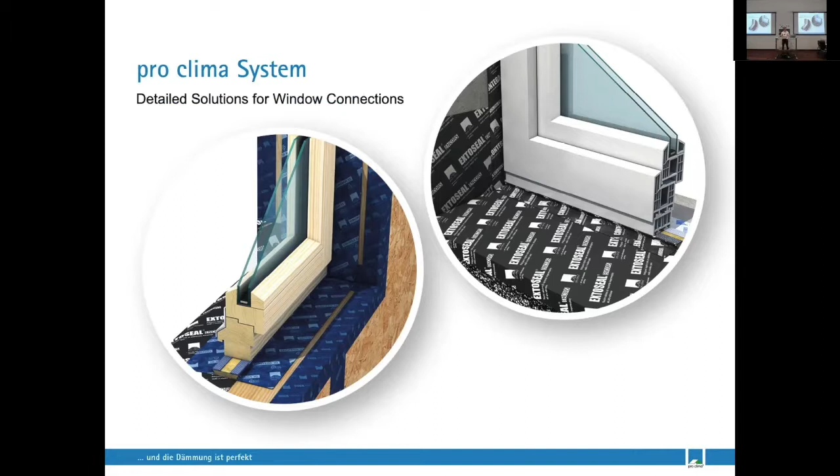All the systems that we do are the secondary barrier. They're not the primary barrier, but they should be the secondary barrier, and they should be 100% waterproof. It's an insurance policy to not get water into that structure and allow the structure to dry out.

Essentially your house is your castle and you want your castle to work. You build this for your family, you build your homes for your family, and you want to protect your family. That's what it's about—having a healthy, safe and durable structure for people to live in.

So the enclosure sits there, you have a building, then you have the elements that go into the building. You've got the construction systems, and hopefully you've layered them right so that the system will dry out. And you have these forces acting on the structure.

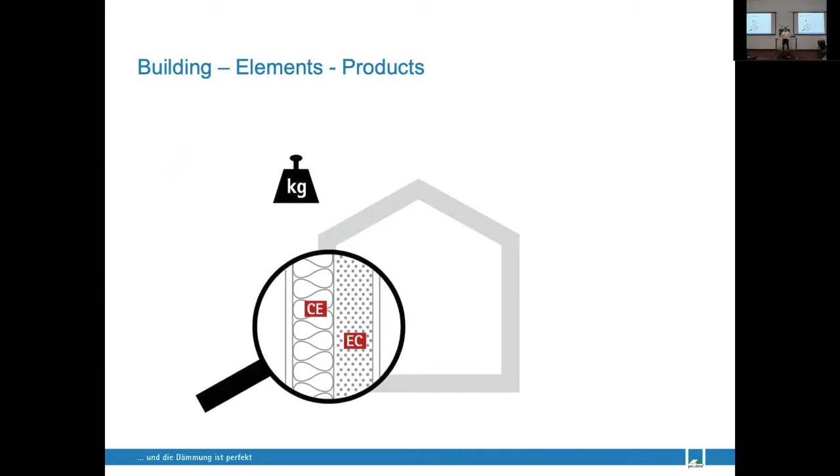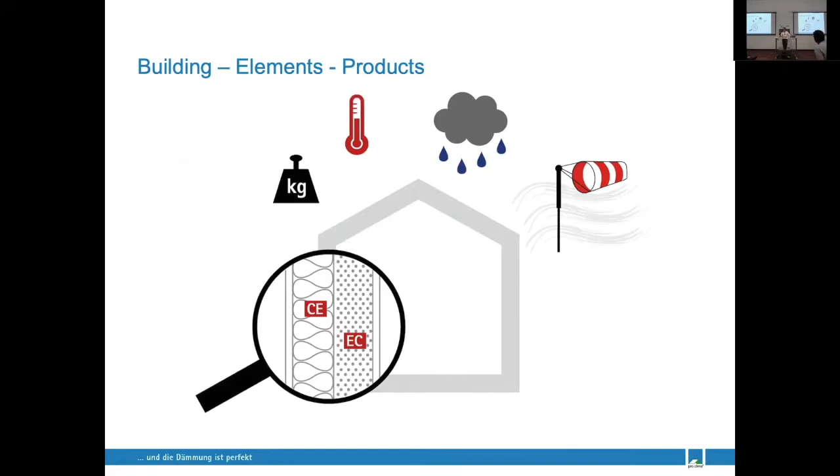You've got physical forces, temperature forces, thermal, and wind and rain forces on that structure. You have to deal with all these in the building envelope, but then you've got additional micro things happening within the structure itself—moisture flows and thermal flows, which affect the hygrothermics or thermal dynamics and the moisture flows in that structure.

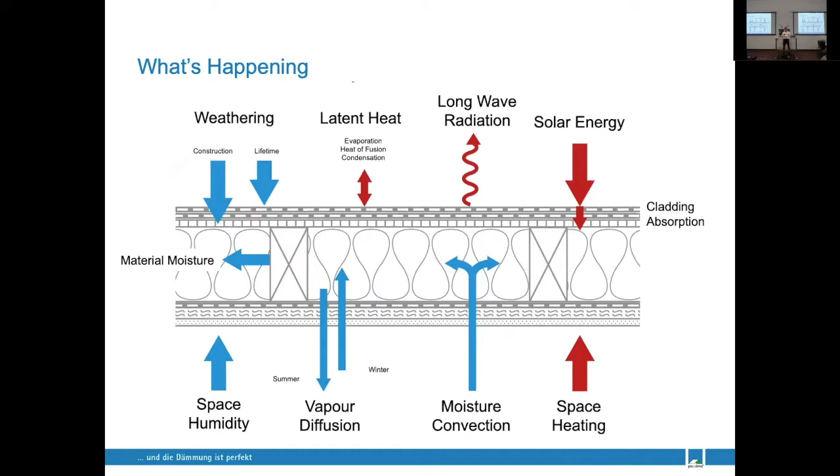So we need those structures to be able to handle moisture. They need to handle the external moisture and the internal moisture, which is built into the New Zealand regulations in some respect. So understanding the fundamental principles helps us design systems that work.

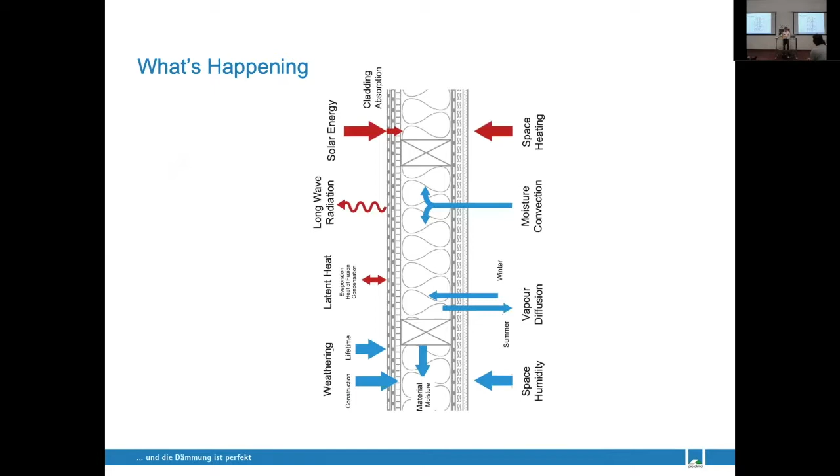In terms of a wall structure, it has to do exactly the same things as a roof structure, and you've got all these things acting on it—vapor diffusion, latent heat, long wave, short wave radiation—all these funky physics things happening.

Driving rain is very important for window installation. Wind pressure is fundamental—wind is actually what drives physical forces on the window, so it doesn't fall out, but also causes water leaks. So managing wind loads on and around the window installation is very important.

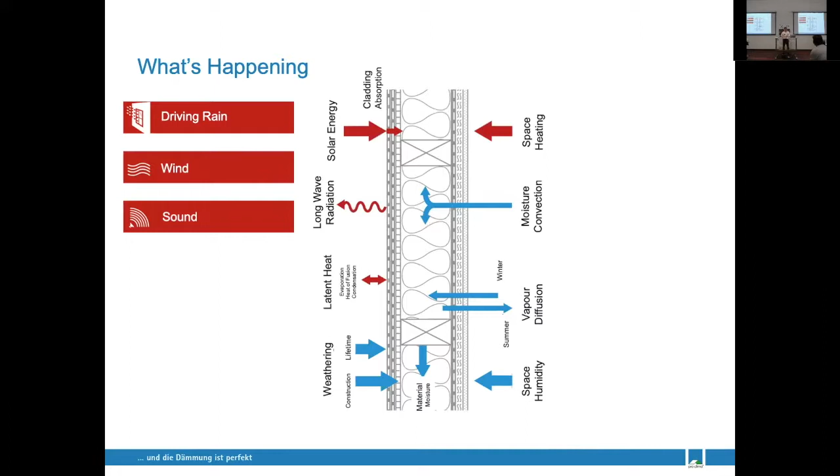Sound—windows systems also have to manage sound. Self-weight, so the whole structure has to stand up, obviously. We have large temperature differences.

In summer, in particular, you can get very hot external claddings and large temperature differentials. You have diurnal swings, very hot during the day, 60, 70 degrees, and then it can go sub-zero at night. So the structure has to be able to handle these temperature swings.

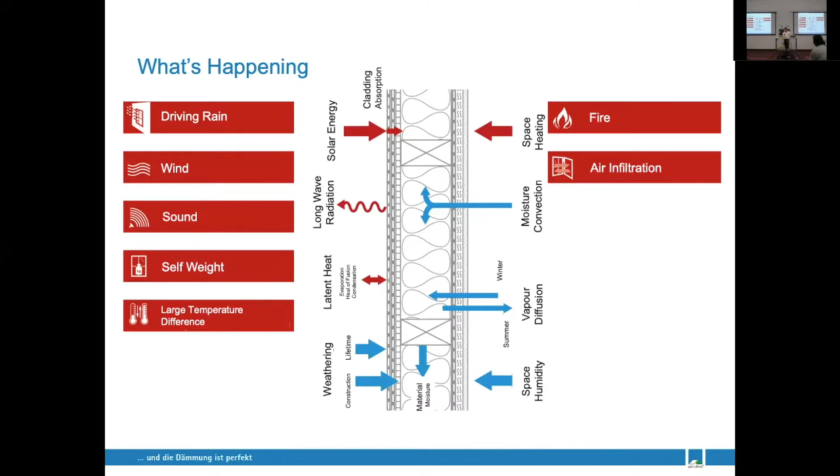Fire properties are important for the building code. Air infiltration—this is from an energy perspective, managing that infiltration so you don't get energy losses or gains depending on the season. Movement of the frame is also important, because that's when things start to fail—if you get moving structures, things crack up and you get failure of the systems. And building movement.

So when you get earthquakes, things move and things break. I don't think I need to tell you that—I'm from Australia, you know more about that than I do.

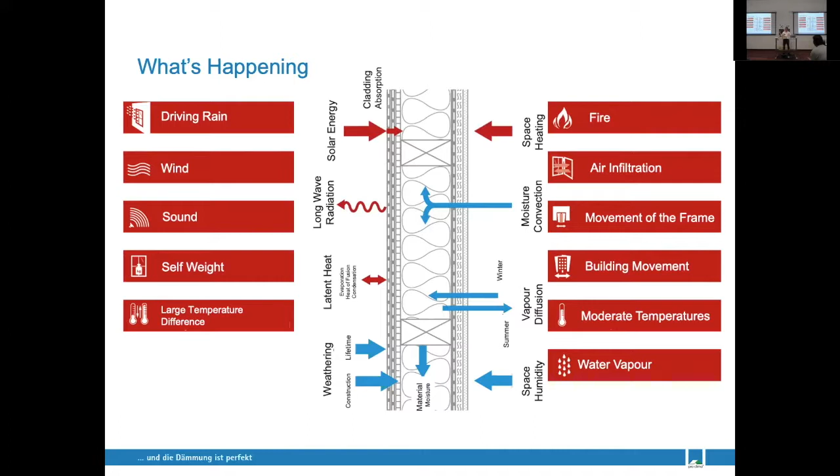Then there's moderate temperatures, the internal temperatures and what's happening inside the structure day and night. And obviously water vapor, which is a big thing Pro Clima is about—managing water vapor getting into the structure and allowing it out, the drying capacity of the structure. If you take all those things the wall system does, we need to put that into the junction, the connection between the window and the wall structure. We need that little gap to do all those things the wall system does, and we want it to be as high performance as the wall system if possible.

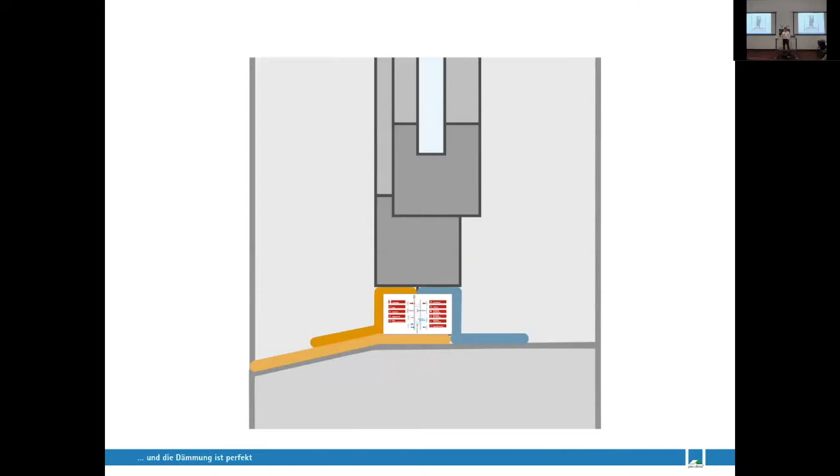So how do we get that to work? We need to make sure the products we use and the workmanship are of high quality.

Looking first at the actual window system, in terms of managing moisture we need to look at what sort of framing systems and glazing systems we're using. If you use double glazing or high performance glazing systems, you're going to keep the internal surface warmer, which is good from a condensation moisture perspective.

What you're seeing here, thanks to Technoform for supplying this, is an unthermally broken aluminium frame that gets very cold. If we're not using decent window frames, we get very cold internal surfaces, and that's potentially a condensation problem—you get wet window frames, condensation forming, and that ultimately results in mildew or mold growth.

So if we start moving towards higher performing thermally broken window frames, this critical line we're looking at is basically a condensation point along the window. If you use better frames, that condensation point moves in and you don't get that cold internal surface, so you prevent the condensation from occurring.

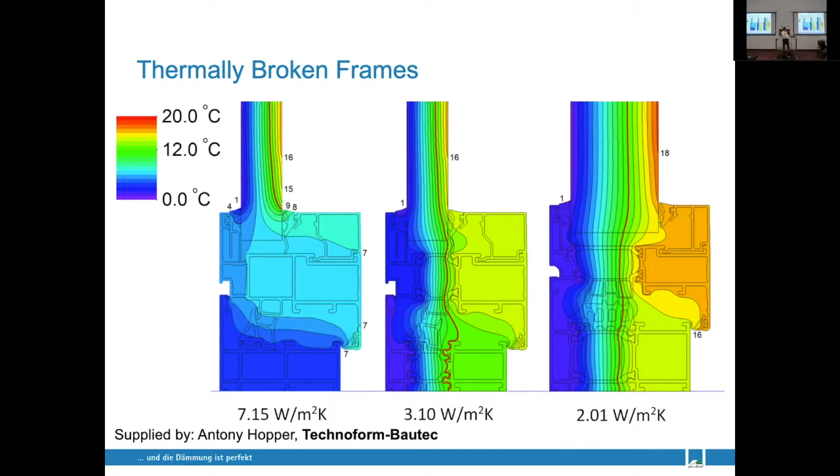And then of course going to super high performance frames and triple glazing units, which are even better. So if we've got this high performing window system...

Air leakage is a big issue. Obviously the window systems have to be air sealed as well. You don't want air leaking through the window frames and through the seals and gaps around, and how the seals on the sashes seal into the window frame itself. So it's very important to have well air sealed window systems.

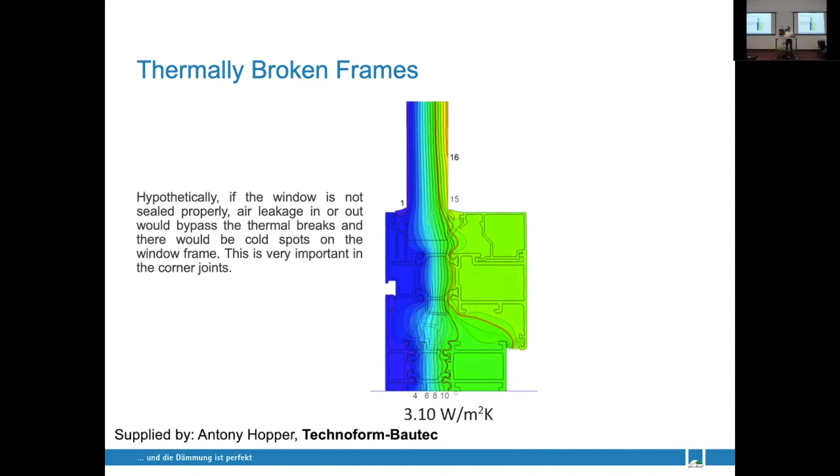And then the thermal breaks in the glazing are very important. This is showing an aluminium thermal break in a double glaze system, where you get higher conductivity around the perimeter and end up with a fair amount of condensation occurring around your double glazing window. This is because it's basically got crappy aluminium within that glaze unit itself.

Versus a high performance, low conductivity spacer within the IGU—then you get that line brought back in, and you don't end up with condensation forming around your IGU. So you should be using low conductivity spacers within the IGUs, or at least asking your manufacturer to put them in for you. So, a warm edge spacer versus an aluminium spacer.

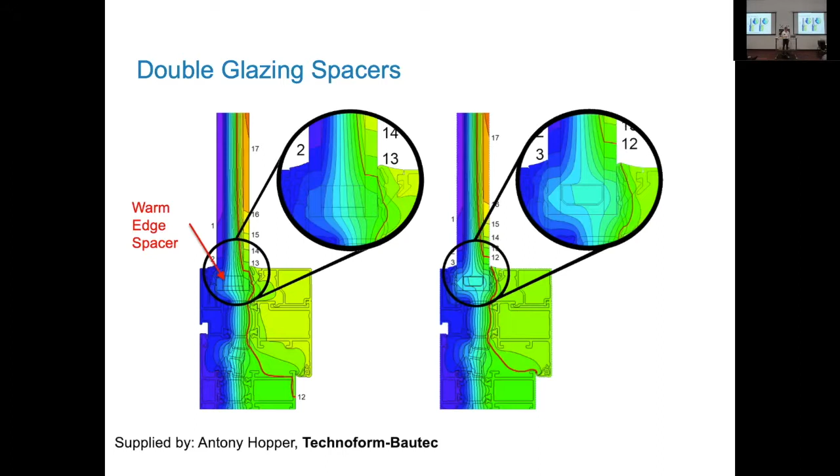There you go. And then once you've got your high performance windows, there's no point in installing them incorrectly. This is showing a relatively typical installation detail for an aluminium frame, with the internal window sill hanging right outside the building.

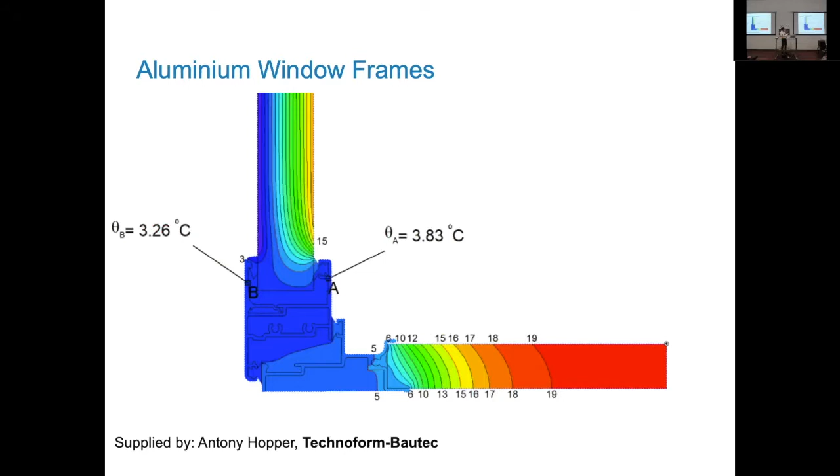The aluminium frame is going to get very cold, and you've got this huge cold surface for condensation and moisture to accumulate on. The only good thing I can say about that is it probably draws a lot of moisture out of the internal air and dehumidifies, but that's probably not the best way to do it.

So then you come down to that scenario where you've got the window hanging right out with an aluminium frame, which is not a very good solution at all.

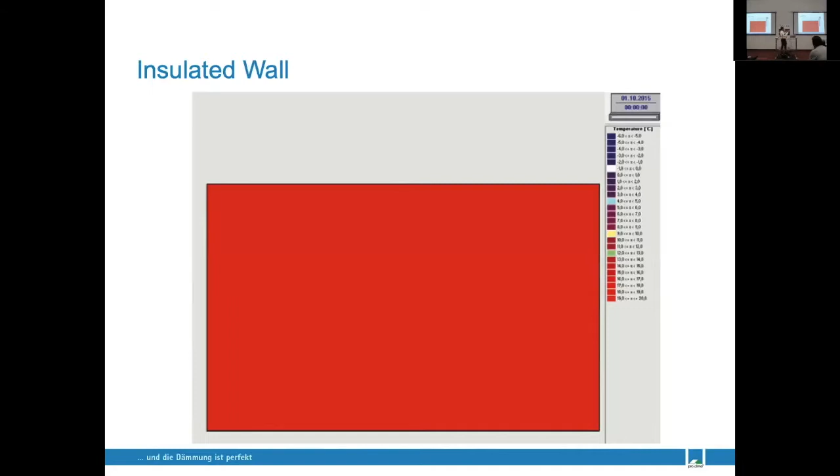So how should we position our windows? Hartwig went through this, but just to recap: if you've got your wall there, it doesn't matter what it is, say it's an insulated SIPS panel for argument's sake. If you look at the isotherms through that, outside and inside, what I call happy isotherms is when they're all separated, evenly distributed, and don't cross or go near each other, so you don't get weird effects happening.

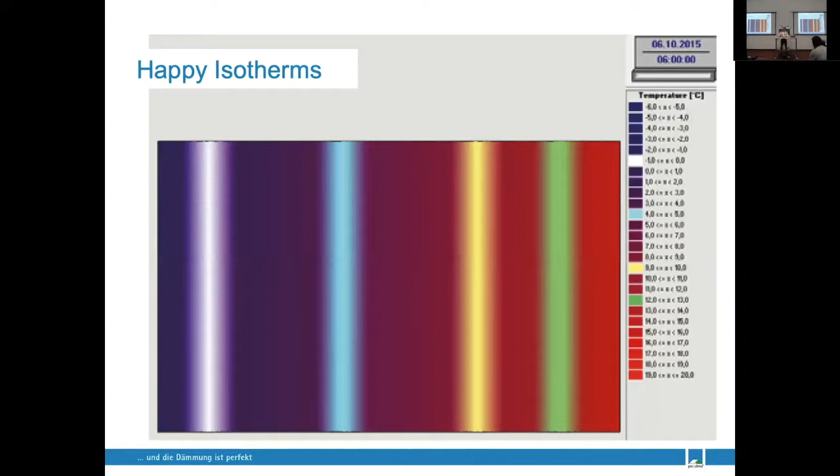They're still happy isotherms when you put your window in the middle. But you can see what's happening there is that the window is actually creating a thermal effect, and those isotherms are having this break in them. It's hard to avoid that.

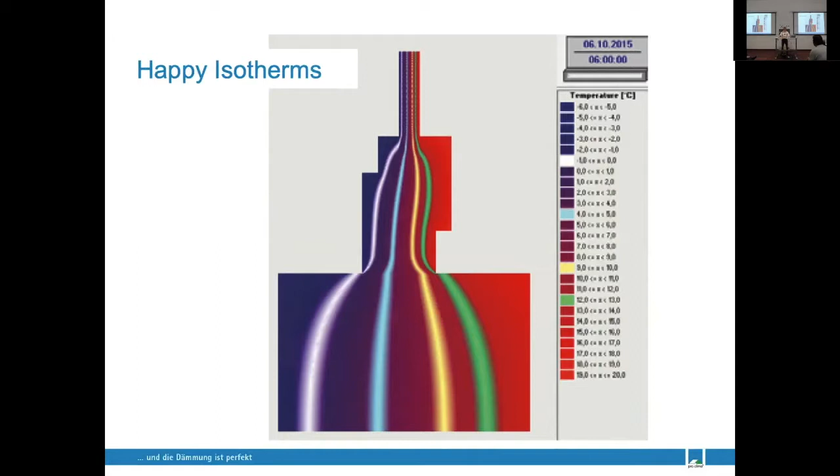Then that's when you start getting into all sorts of details around window junctions and organising the insulation layers such that you can optimise that for thermal performance.

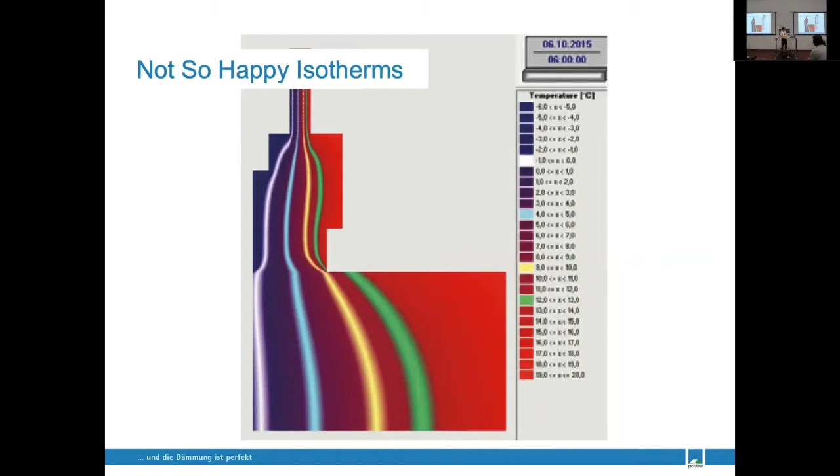So then, as Hartwig was discussing, if you change the location of those windows and put them on the inside, you've got this scenario with a cold internal surface, and it gets nowhere near as good performance. If you put it on the outside, you've got this cold spot in the corner, as Hartwig mentioned. So obviously the best place to put it is in the middle. How do we get window details where the window goes in the middle of the insulation system of the insulated wall section, depending on how you make that? It could be anything, but it just has to sit in the middle of the insulation section.

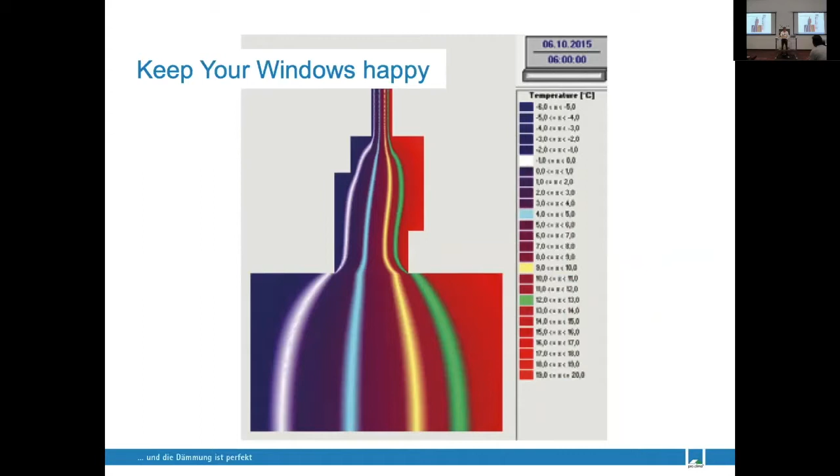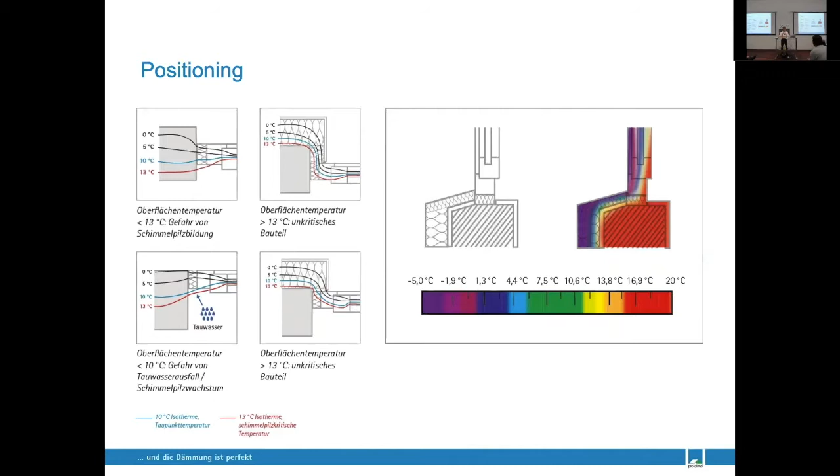There are all sorts of details and ways you can address that, and Europe's gone far further down the track looking at exterior insulation systems and how they wrap them in. But we have different construction practice here, a lot of lightweight timber frame, which gets back to the EIFS systems and how the US suffered water ingress issues. So how can we learn from North America and Germany, and get those details so we can manage thermal performance but also moisture ingress.

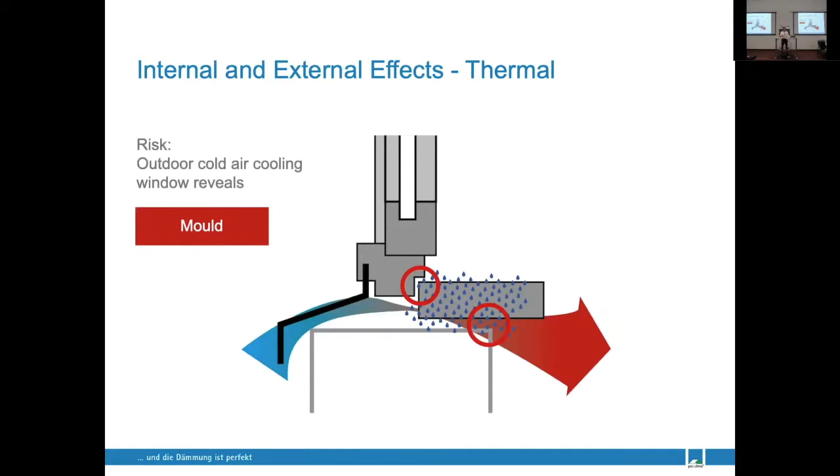So fundamentally, air and moisture are interlinked, because basically you have humidity or moisture in the air itself. If you have air leaks around your window, it can carry moisture with it. So when you have cold air transferring from outside and it cools down an internal windowsill, you can end up with cold spots and then high moisture content in the windowsills, which then turns into mold growth and long-term durability issues. So that's a bad thing.

And that's just an example. Again, this is a German windowsill, but it's an air leakage problem that's cooling down the internal surface, resulting in mold growth - you can see a bit of staining in there.

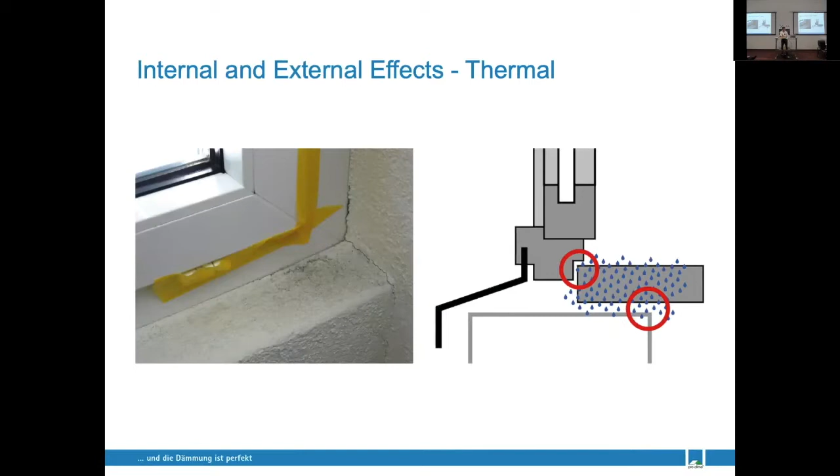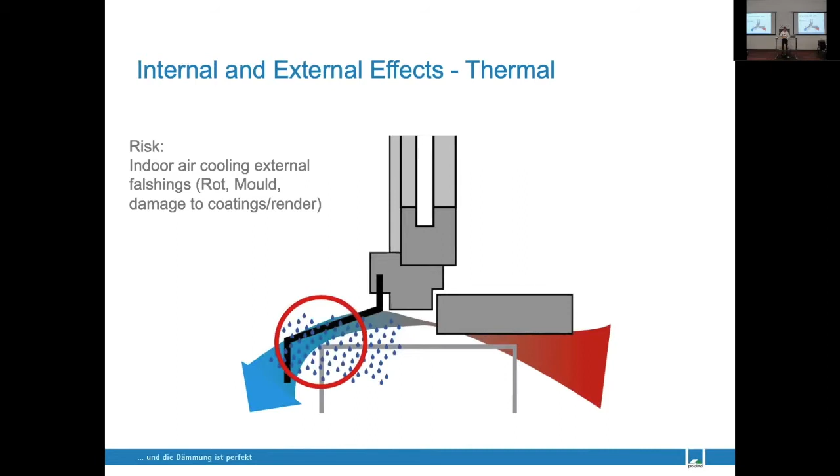Then you've got it going the opposite direction. You can end up with warm, internal humid air from the building leaking the other way, out through the junction point, and then you end up with potential moisture accumulation, rot and mold, and damage to coatings or render on the outside of the structure - so there's some more staining on the external side there.

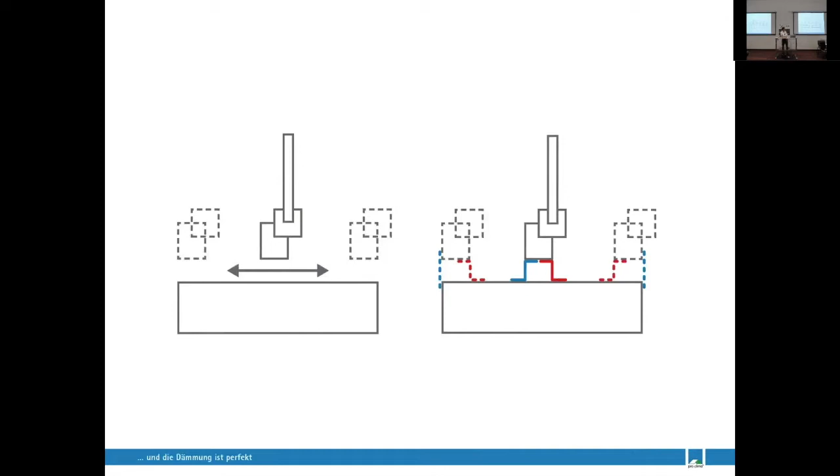Basically, positioning the window - we've talked about that, but how do you position that window and also seal it in? We're talking about the window sitting in the middle; yes, it can go on the inside and outside, but optimum is in the middle. Then there are the sealing systems and air sealing and weatherproofing systems to get the window to work from an air leakage and water vapor transfer perspective.

So Pro Clima has some taping systems that go around the windows. They can be installed in different ways depending on whether the window is already in the system - you can come along and retrofit the taping systems afterward to create an airtight and vapor control seal. Other systems actually tack onto the window, attached to the frame before you insert the window into the window reveal, and then it tapes down. These two systems are examples of that, and ideally those window systems then enable you to put the windows in the center of the wall or insulation layer.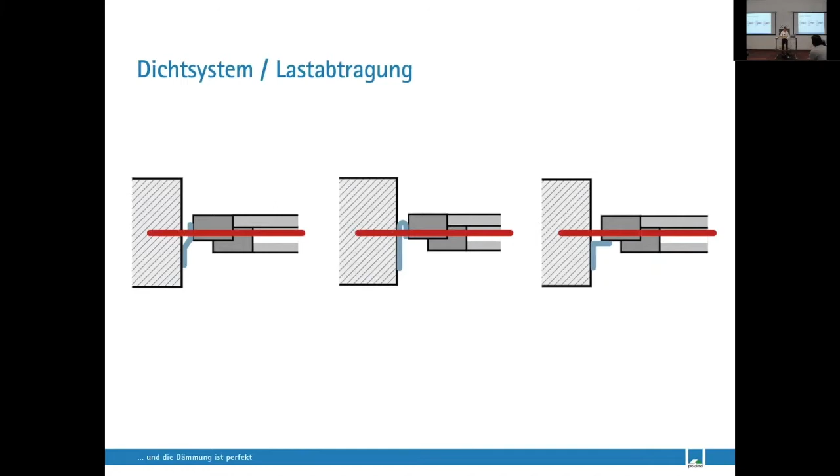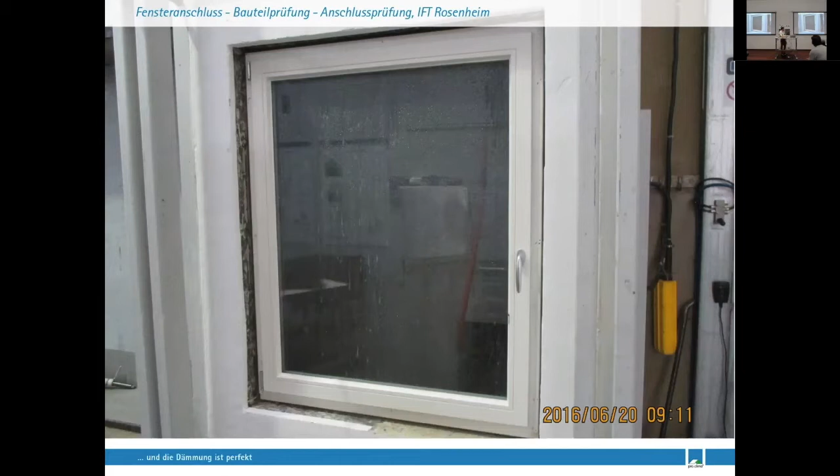So we've undertaken some testing at IFT Rosenheim in Germany, the Institute of Fenestration Technology in Rosenheim. They're one of the world leading research organizations for window performance.

And we tested it in the weatherproofing rig. The idea there is that you put water spray onto the window and apply a pressure, and that induces air leaks around any points in the window. Air leaks are what induce water leaks through any construction system, but in particular around windows. So if you have any air leaks, there's potential water leak under wind, driving rain conditions.

So the thing we found is that when we tested it, we took the pressure up from zero, went through this sequencing, up and up, took it up to 600 pascals. But the interesting thing is that the flow rate, the air leakage through the gaps around the window, stayed at zero. So it's essentially a perfectly sealed, air-sealed system.

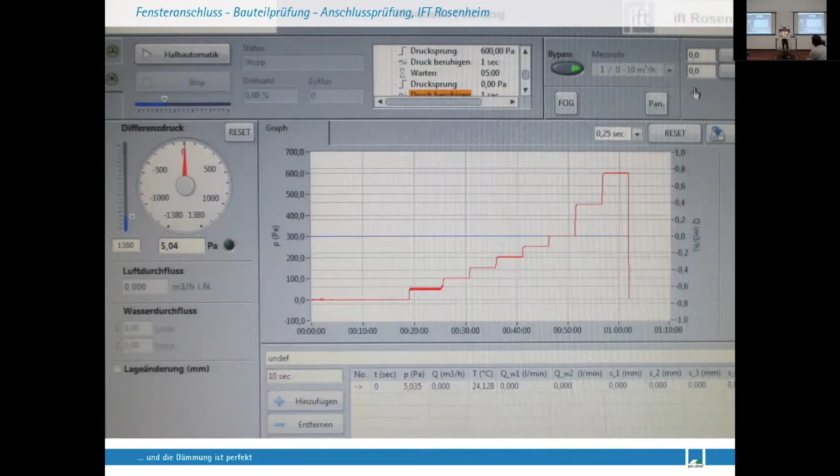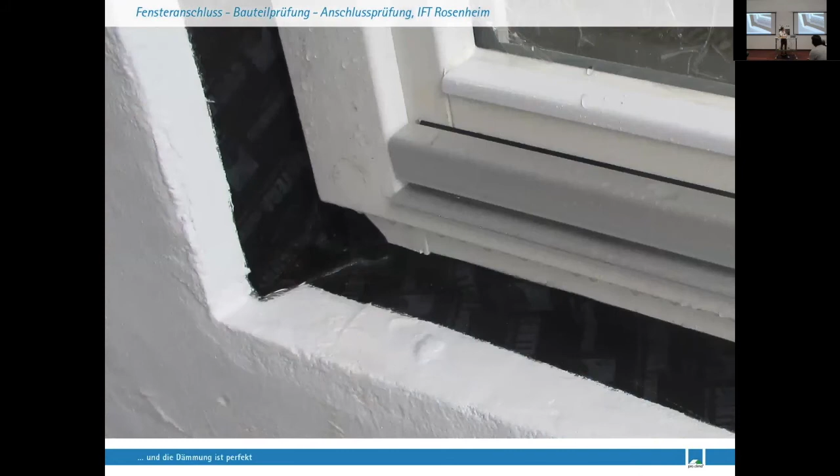If you install those tapes with good workmanship and good quality products, you get a perfect air seal, a perfect watertight seal. So you can't get water going in around that window system. This is the gap around the window, and they were all taped up - on the inside and the outside, with flashing tapes around the outside to seal those windows in, plus the extra seal product taped up and sealed onto the window.

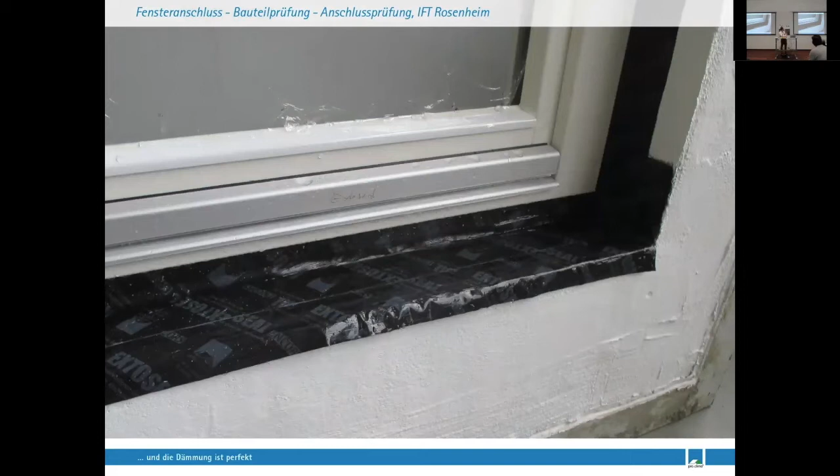What we did is we took it up to the test pressure, and when we weren't getting any airflow, it's a bit boring. Tests that actually pass are really boring. Tests that fail are really exciting - it's a bit like Mythbusters. If it doesn't fail straight away, see if you can make it fail.

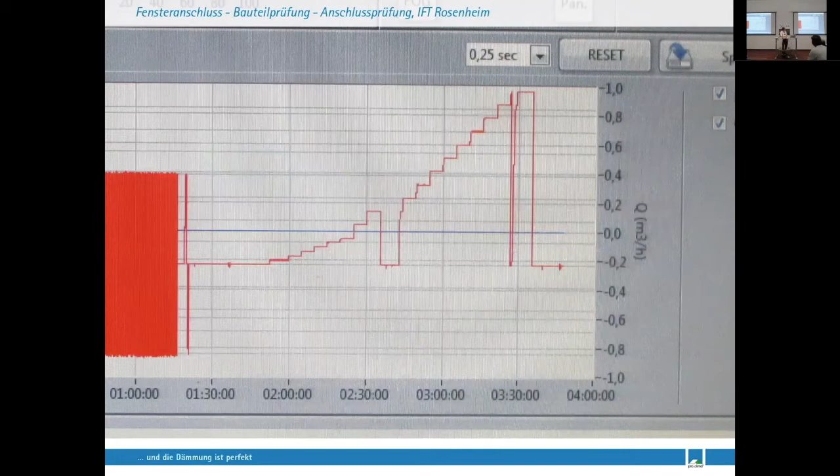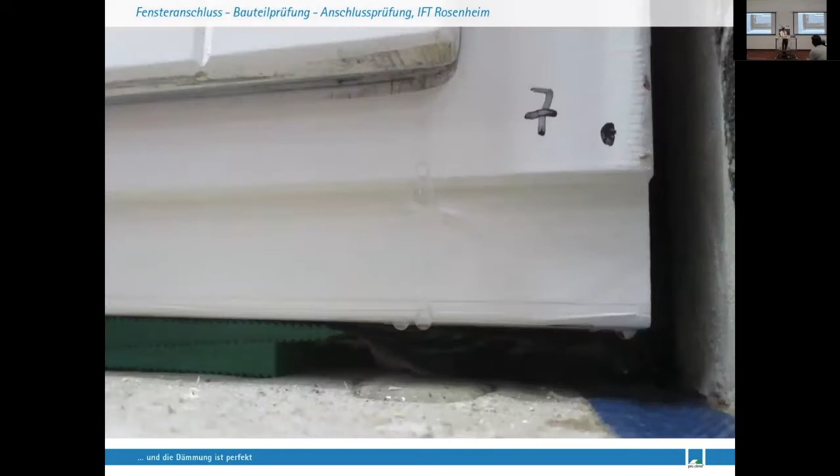So we took the pressure up and up, and the window itself started leaking, so we had to gunk that in, but the seal around the outside wasn't leaking. You could see water leaking around the window itself, but it wasn't coming from the seal around the window. The pressure we got to was 2,000 pascals, so 2 kilopascals.

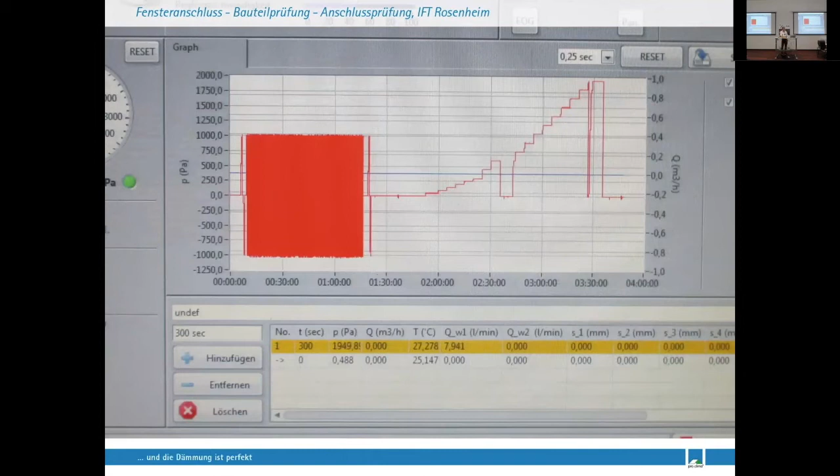The regulations - I'll state what that is - but the taping systems all stayed in place, maintaining that airtight seal up to 2 kilopascals. And 2 kilopascals is a lot of pressure.

So would that pass everywhere in New Zealand? Yeah. So on altitude or building height? Yeah, building height - when you get really tall buildings, you get higher pressure. And this is a problem we're seeing in Australia as well.

People are using residential window systems rated at residential pressures. The residential test pressure is about 200 pascals - we were at 2 kilopascals, so 2,000 pascals. So those window systems measured at 200 pascals in Australia - people put them on high-rise multi-res and then wonder why the windows are leaking water into the internal space. Well, because they weren't rated at such high pressures when you go up into taller buildings.

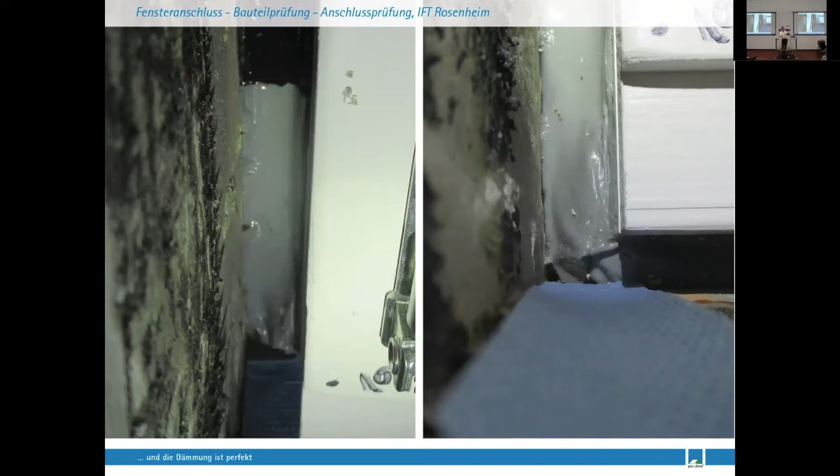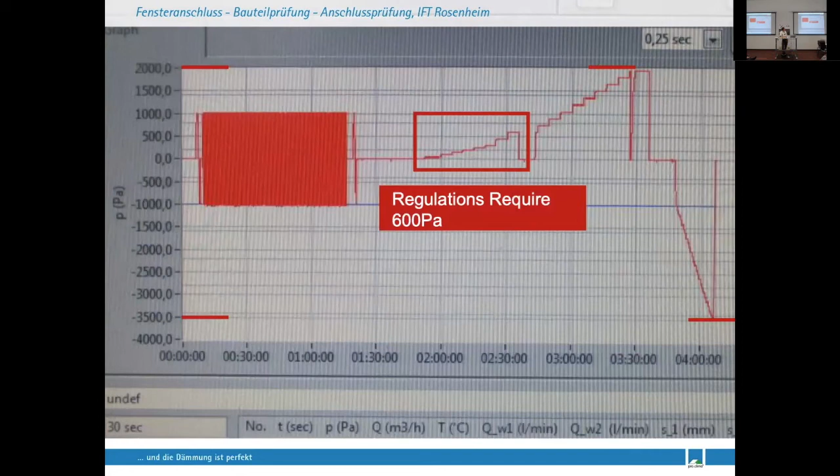So the regulations require 600 pascals in Germany. We took it up to 2 kilopascals, so we went way above and still got zero air leakage through that connection point around the windows. That's the last slide, but fundamentally, you air seal a window in, it's going to be weather tight.

So then it comes back to those details around whether you're using a solid masonry German-style insulated system, or a lightweight timber structure. Either way, it has to maintain those air seals under all the movements and forces of temperature and temperature cycling. So the durability of that window install depends on how long you can hold that air seal for. And then obviously the drainage, flashings and detail to get the water to the outside is fundamentally important. Thank you.